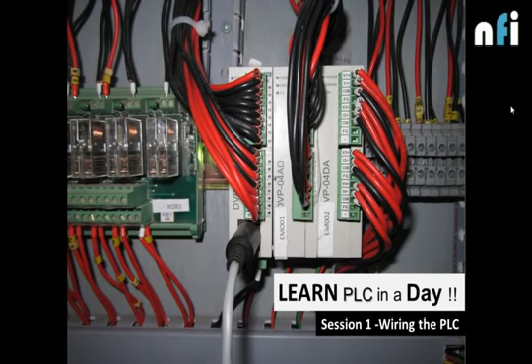Okay, so welcome to the Learn PLC in a Day Session 1, which is wiring the PLC. In this session, we are going to learn about how to wire a PLC. Now, when we are going to install a PLC in any panel or in any machine or in any process, first we have to wire it up. So we'll understand how to wire a PLC, which wires to be connected where.

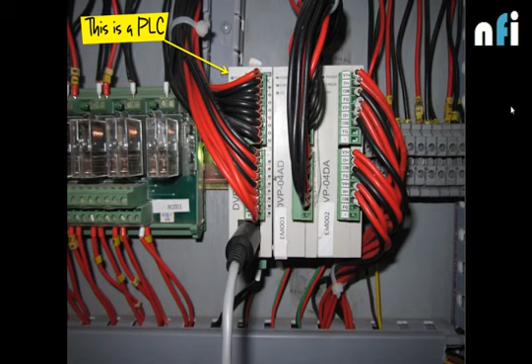So very quickly, let's understand the basic components of PLC. Now, in front of the screen, you can see this is a PLC by the company Delta Electronics, and we have some input terminals. These are the terminals onto which we'll be connecting the inputs. Now what are the inputs? Inputs can be switches, sensors, limit switches, any source of inputs. Then we have the output terminals. You can see here, these are the output terminals onto which we'll be connecting the outputs.

Now what outputs and inputs there are in any machine depends on the various processes. For example, suppose you're going in a lift. You push a button. That button is your input. That button tells the lift which floor you want to get to. The movement of the lift is by the motor. That is your output. So the button is the input which will be connected to input terminals, and the motor will be connected to the output terminals. But what happens inside is the program, how that controller has been programmed.

In a similar way, we will program this PLC using this programming cable. We have to make a program in the computer, then download it into this PLC, where it will remain stored. So it's all about programmable logic controller. That's what PLC stands for. A controller which can be programmed using various logics. Logics can be if, else, or, and, not. That's the logic we use in our day-to-day life, and similar logic we can program in a PLC.

I'll show you another PLC of the company Siemens, code S7-200 CN. Similarly here we have the power, 24 VDC, which is used to run the PLC. Then we have input terminals as we have in Delta. These are the output terminals. Then we have this programming cable which is used to program a PLC. And then a small battery, which is used to store the program in case of power failure.

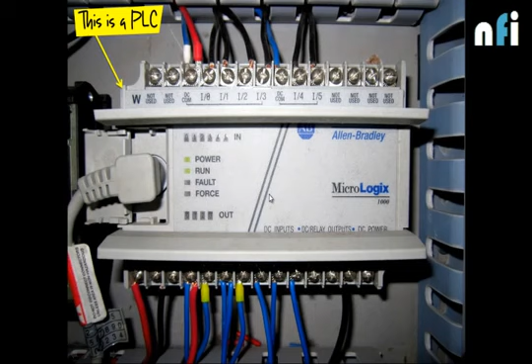Now, another PLC of the company Allen Bradley, MicroLogix 1000. Similarly, we have input terminals here, output terminals here, and again a programming cable to program the PLC. Then the power of 24 VDC, which is used to run the PLC. Now you can see some indications here. When the PLC is on, you see a green light. When it is running, you will see a green light again. When it has some fault, there will be an orange light here.

And when there is a forced input, where we are driving the input from inside the software instead of switches, there will be a force light here. So these are the basic components of what a PLC is all about. Okay, so this is the software in which we are going to learn about how to wire a PLC.

This software is Automation Studio by the company Famic Technologies, which is in Canada, and this software is being used in our academy to teach the students how to do the electrical wiring, how to make sophisticated circuits, and how to test and simulate them, so that after making circuits in this software, we implement them practically.

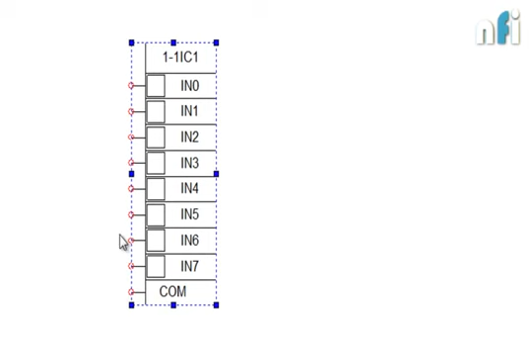So let's take some PLC cards. This is my PLC input card. It is analogous to the input terminals which you have seen in that presentation. So let's take some power sources. Now this PLC I assume is running on 24 volts. So I'll take 24 volt and I'll take 0 volt. Now as this is the software, this PLC doesn't need to be connected to power sources. These will be connected internally by the software. But we have to provide voltage to drive the inputs.

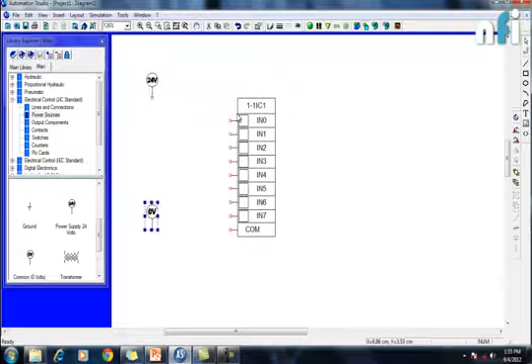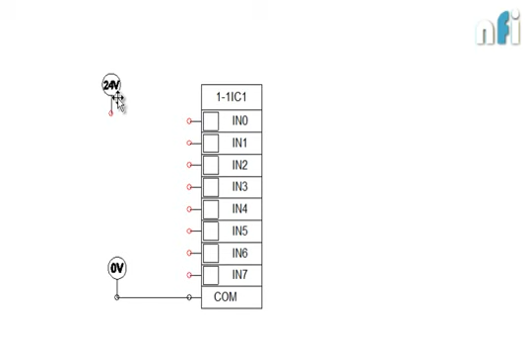So first understand how these inputs will run, how they will indicate that there is some voltage or some physical activity outside this PLC. You can see a common terminal here. Now I'm going to connect this 0 volt to this common, like this. So my 0 volt has been connected to common. Now, you have to understand that we need to create a potential difference of 24 volt across these input terminals. Only then will this PLC recognize that there is some input.

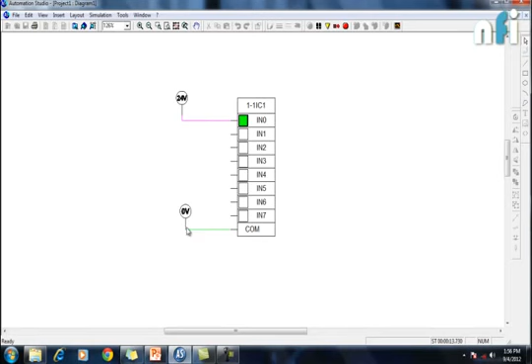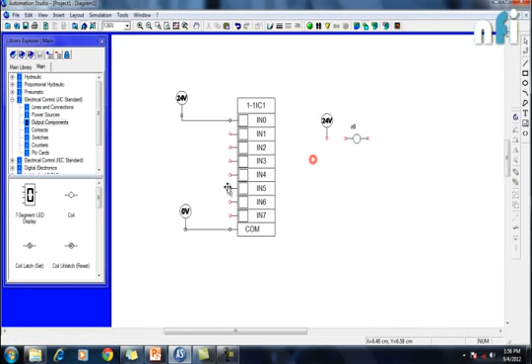For example, if I connect this 24 over here and simulate it, you will see this is on. This is on because of this 24 volt and the 0 volt. This 0 volt is connected internally to this input. So we have created a potential difference of 24 volt. Now let me clear this understanding. Let's take a relay. For example, I'll take a coil, this one. Let's name it R0. So let's take another voltage source, 24 volt, and this one.

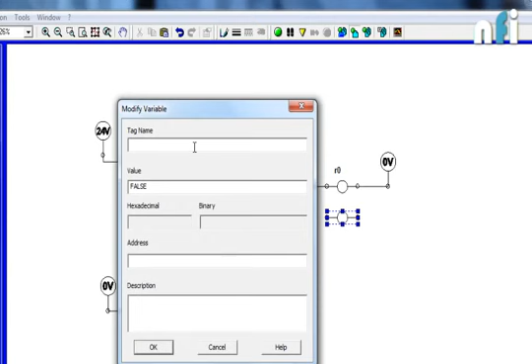Now this is my electromagnetic relay. What happens when I provide a signal of 24 and 0 across its two terminals? You will see it is on. In a similar way, these are the internal relays of a PLC. You need to provide 24 volt potential difference across every terminal to make it on. So if I take another relay like this, and let's name it R1, and I connect this with this and this. Okay, let's not connect it initially.

Now you see, this relay is getting 24 volt potential difference. This is on, and this is open from one end. Similarly, these all are open from one end. They are getting 0 volt from here, like this relay, but 24 volt is not provided. So when I provide this 24 volt, this relay will be on. You can see here. Similarly, if I connect other terminals to 24 volt, this will be on. So the concept is we need to maintain a potential difference of 24 volt across this input and the common.

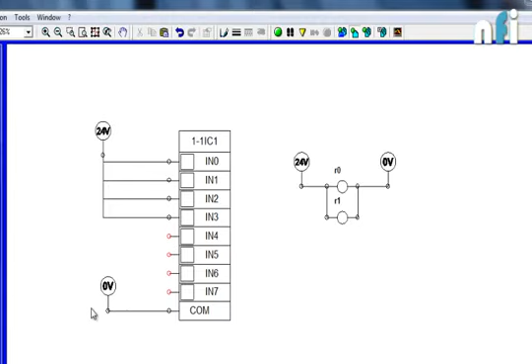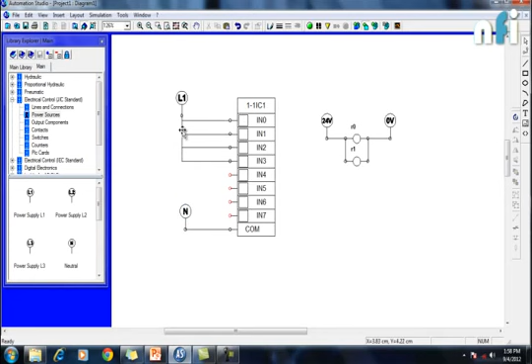Now in many PLCs, instead of 24 volt, you may find line and neutral, because that depends on the manufacturer, whether they provide 24 volt DC inputs or AC volts. In some PLCs, instead of 24 and 0, it is written live and neutral. So in that case, you have to give live over here, L1, and instead of 0, you have to give neutral. So this can be the case in some different PLCs. We have to check on the PLC whether it is DC voltage driven or AC voltage driven. So let's remove it for a second.

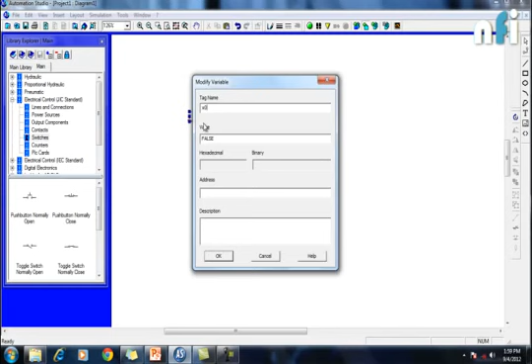Now this was my input card. I'm going to connect some input switches here. This is my push button. Let's take it X0. Now I've connected this to IN0, and again I need some power sources. Let's say 24 volts. Okay, so what happens if I don't connect 0 volt over here? Nothing's going to happen. It's not going to turn on because there is no potential difference. There is nothing at the common end. So we have to connect 0 volt as well.

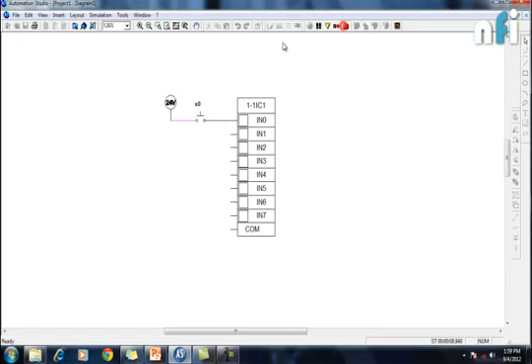Okay, so now I've connected a switch. This is a normally open push button, which is spring loaded. When I press this switch, the input will be on. When I release it, the input will be off. So this is an input switch. You may find such switches in your panels and in other machines. You may find some green buttons. This button is connected in this way: it is connected to some inputs, and the common is given 0 volt. So similarly, let's connect some other switches.

This is my normally close button. As its symbol indicates, it is passing the signal in normal position. That is why it is called normally close, because the switch is closed normally. When I press this button, it will be open, and it is again spring loaded. When I release this button, it will be closed again.

And this is normally open. Normally open means when I'm not pressing this button, the circuit will be open. When I press this button, it will be closed. So these are the different types of switches which we can find in the inputs.

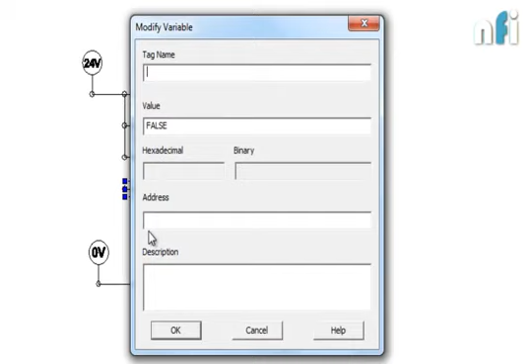Now let's have a toggle switch. Let's name it X2. Let's connect it to IN2, and then again this to 24 volt. Some more input buttons. These are again normally open toggle switches.

Now this toggle means they are not spring loaded. They are retentive. They have retentive position. When it is open, it is open. When I close it, it will remain closed. So that's the beauty of the switch. So I have connected 4 switches.

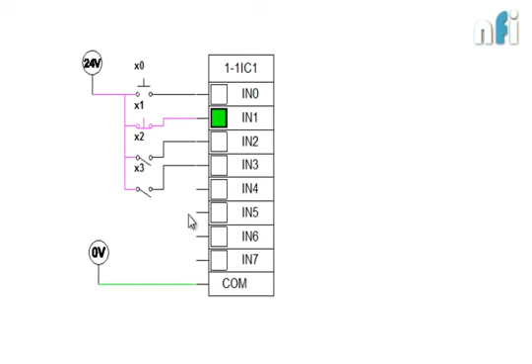Now I hope you have understood that this is on because this 24 volt is already across this terminal, IN1. This will be on when I press this button, and again, similarly with these cases. So this is my input section, how we are getting the inputs from the outer world and how this PLC is judging the inputs just by this voltage. Again, where you're gonna have potential difference, that input will be on. So this was about the input card of a PLC, or you can say input terminals of a PLC.

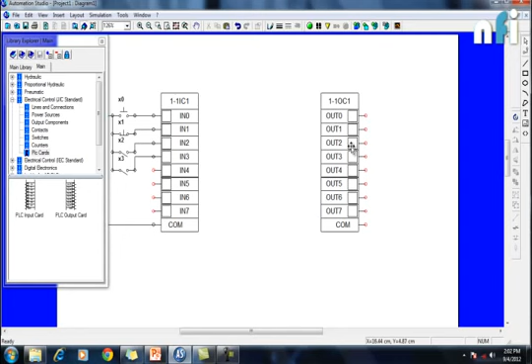Now let's see what happens at the output terminals. For that, I'm going to have this output card from here. You can see like this. Okay, so I'm placing this output card a little bit away from that to make the concept pretty easy. Similarly, we have different outputs, out 0, 1, 2, 3, 4, up to 7. Then we have a common output.

Now, similarly, I'm going to connect this 0 volt. I can take the wire from here to this common output. Now, here I'll be connecting the output components, not the switches, but the output components. So let's see what we have in output components. We have coils, LED display, coil unlatch, latch, solenoid, indicators. So let's take an indicator.

Now this indicator is my light, so let's name it Y0. This is an indicator light. I'm going to connect one end of this indicator to this out 0. Now I have to give 24 volt to this other end, again to maintain the potential difference.

Now what happens here is, when I simulate that, this 24 volt travels to the one end and the other end is not connected to this 0 volt. Why? Because in this case it was already connected here, but in this case it is not connected, and this will be connected only after we do the programming. It won't run when I press this button or this button, but how it will run depends on the program. So this is my output, not running right now.

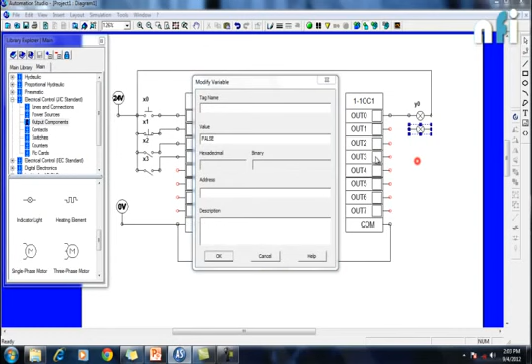Let's have some more outputs here. Let's call it Y1. Enter. So I have connected 2 outputs now. Both are not running because I haven't programmed the PLC. Now what does a program do? Program will link this input section with the output section.

Suppose I want, by pressing this button, this first light should be on. I have to make the program according to that. But if I want both outputs to be on after pressing this button, then I have to change the program. I don't have to change the wiring. I have to just change the program. Similarly, if I want that by pressing this button both should be on, I have to change the program only. Wiring is one time. Remember these.

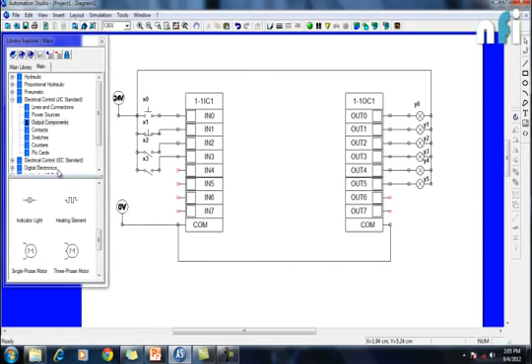So this is all about the wiring, how we have to wire the input section, how we have to wire the output section. We can similarly connect some more inputs. We can connect some more outputs like this. So you can see here now I've connected 6 outputs to the output section and a few inputs to the input section.

Now in the next session we are going to see how to make a program, how to make these outputs glow by using the programming. We are going to see how to do the programming. It's based on simple logics, OR, AND, NOT, if else, timers, counters.

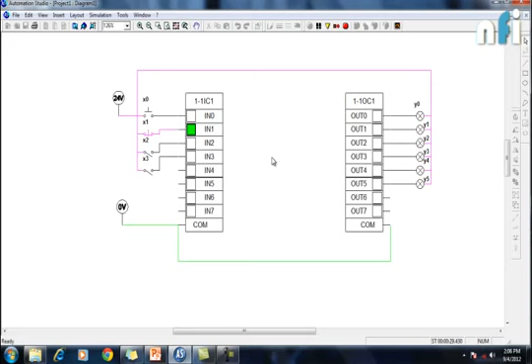So this was all about the wiring.